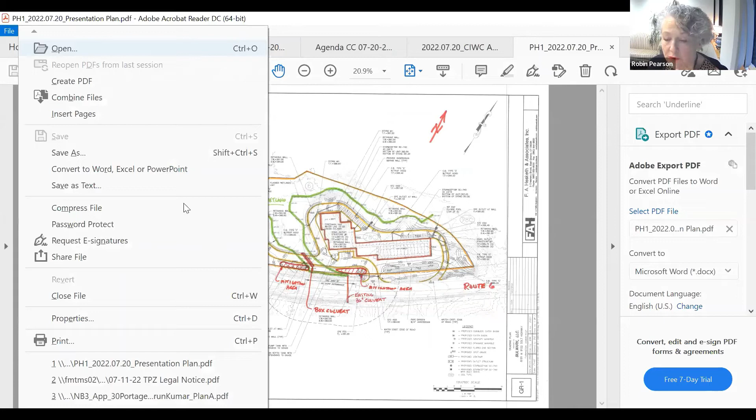On the call with me this evening should be Matt Morris for the applicant, David Ziaks with F.A. Hesketh and Associates, the lead engineer on this proposal, and also Anthony Zemba, who is a certified ecologist and certified soil scientist, who has provided additional information to you. He is with Land Tech, and you should have, as part of your materials this evening, some additional work that he has done with regard to questions that came up. They include an analysis that he did when he revisited an area that was identified as a potential vernal pool, though at the time of his initial review, he did not believe that it was, but he did revisit the site and has provided you with a memorandum that describes his finding as a result of that revisit. And then there is also a memorandum in the file now that is dated today, which responded to questions that were raised in the documents that we received from staff and with regard to the agenda review.

So actually, before I turn it over to Dave Ziaks, I'd just like to say one thing, which is that we understand that your next meeting is not until September 7th. And I just want to put on the record for you this evening that should you decide to keep this hearing open, we would, of course, provide you with a written consent to do so and to continue this to the September 7th meeting. So with that, I'd like to, pardon me? Thank you for that. Okay. For that, I'd like to ask Dave Ziaks to proceed with his presentation. Thank you.

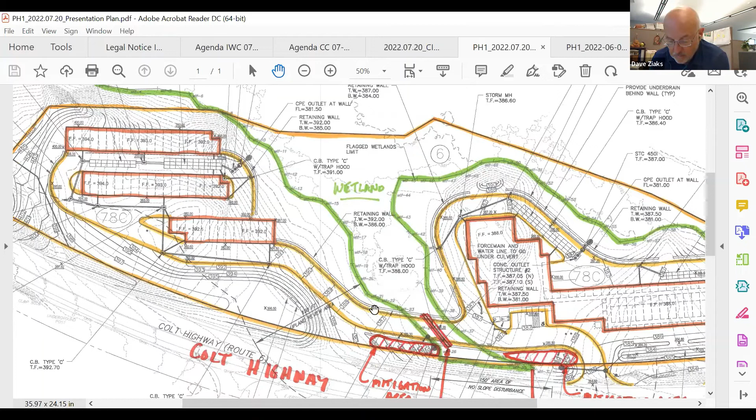We will need to excavate pad sites on both the left and right sides to accommodate the buildings. So as the commission members that walked the site could see, we have topography that's sort of all over the place, and we need to create relatively level pad sites to accommodate the buildings and the driveways around the buildings. The maximum coverage that is allowed in this zone is 40%, and all of our impervious coverages are under that. We're at about 39.1%. That includes the buildings and all of the pavement.

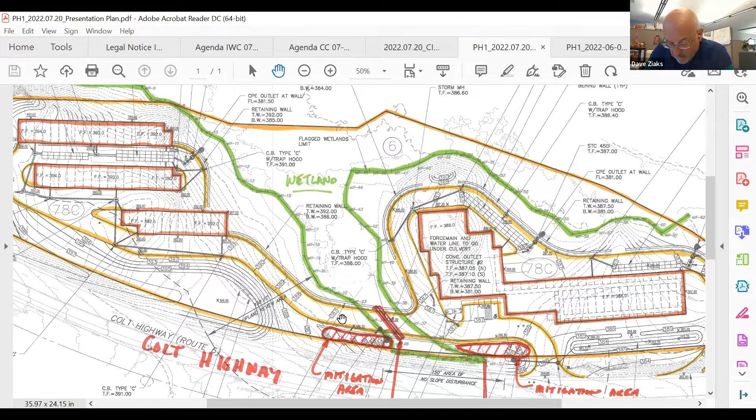For the drainage, we've completed a comprehensive analysis report dated June 3rd, I believe, and we provided that to staff. Your engineering department has had a chance to review that. The property is actually a very small part of the overall Bass Brook watershed, which starts north of here and continues to the south. It primarily flows downstream through culverts under the highway to what is known as the Deadwood Swamp, which is further to the south of this site, and it's a rather extensive wetland system down in that area. Most of the runoff from Route 6 in this portion of the highway is by sheet runoff to the north side of Route 6.

And actually the highway in this area is slightly superelevated, which means it pitches from the south to the north. And that's for geometry associated with the very large curve that exists in Route 6 at this location. That drainage then gets collected along the northerly side on our property, and then goes through a 36-inch culvert under Route 6, and again continues to the south to the swamp. In designing our drainage system, we had 4 goals basically in mind.

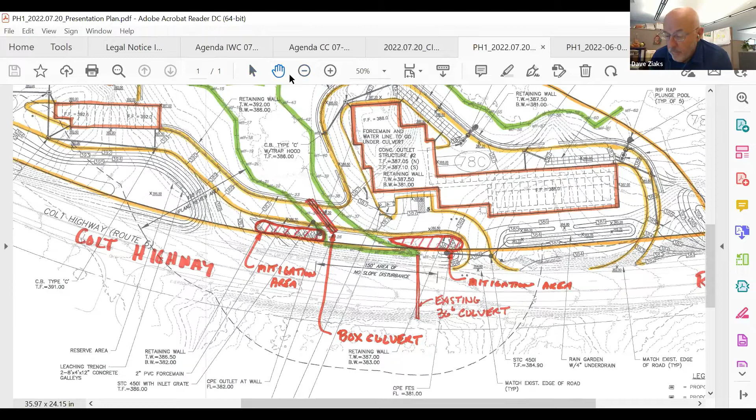Because the topography of the site has runoff heading to various points along the edge of the wetlands on both the west and the east side, we wanted to have several small discharge locations to sort of mimic the existing sheet flow from the existing topography to the wetlands. A lot of times you'll see projects that come before you where drainage systems are used throughout, and then the flow keeps getting consolidated, maybe over to a detention basin or something of that, and then released via some sort of an outlet structure, but it ends up being a fairly large consolidated discharge point.

By doing this system that we have, we now have 4 locations where there's a relatively small amount of flow coming at any one of those locations. And it sort of mimics the application of the water to the wetlands as it exists out there today.

We were successful in maintaining the peak flow rates below the existing conditions heading downstream for all the storms, 2 through 100-year storm events. We have provided water quality treatment, including some infiltration, we believe, with the underground systems that we have employed, that we will get some underground infiltration. We have not used that sort of credit in our calculations.

We have just assumed storage in determining peak rates, but I think that ends up being a fairly conservative design, because there will certainly be some infiltration in the site once we get into excavation and installation of our systems, which will be surrounded by stone and other gravel materials. We will get some infiltration. And then we've also added hydrodynamic separators to the outlet points, which will give us our pollution removals that are mandated by Connecticut DEP.

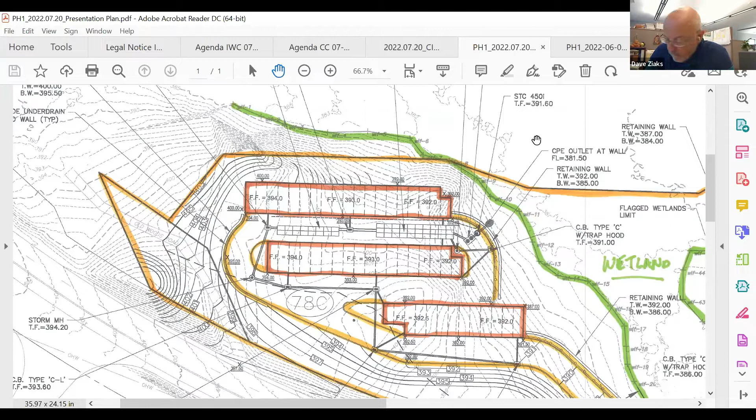We did manage to introduce some LID feature, principally a rain garden that will be constructed along the face of the easterly building. It will collect sheet runoff in that area and then blend into our storm drainage system. But we have a nice rain garden proposed in that area there to capture the runoff before it reaches Route 6. So in all, we believe our goals have been met with this design, and they are consistent with your town engineering standards and Connecticut DEP standards for water quality and for overall stormwater design.

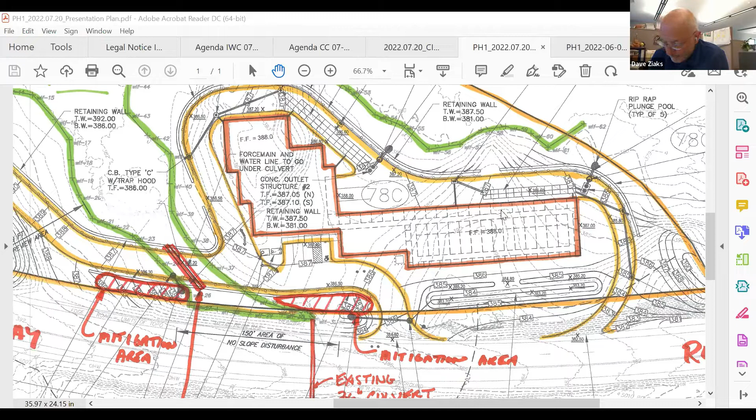As far as utilities go, we don't need a lot. We'll be installing a water main up Route 6 from basically where the apartments are that are right next to the Hampton Inn. The water main was left at that location by the Connecticut Water Company for the purposes of serving Route 6 maybe someday. So we'll be extending that water main up to our site, to our driveway. Most of that's for fire protection for the multi-story building, but obviously we can use it for whatever domestic use we need for our toilets and the like, because we will need some bathrooms.

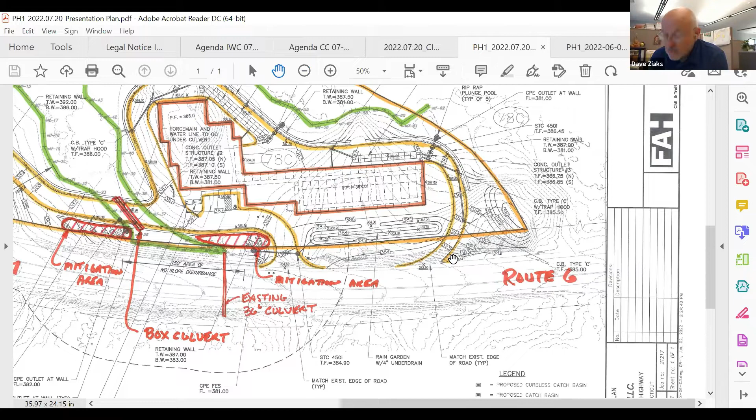And we will be installing a small on-site septic system over sort of right where the hand is there now. There's actually a pocket of some decent soil right in that area, but the system's going to be tiny. It only needs to be 50 to 75 gallons per day for the toilets and sinks that we'll need for the employees at the site, and possibly a customer who might want to use the bathroom.

As far as the wetlands disturbances being proposed, again, most of the site falls within the 150-foot upland review area. So our disturbance is 2.99 acres of that 3.51 acres that is on our site and within the footprint of our development. We have the driveway crossing, which will have a direct temporary disturbance during construction of 2,750 square feet, and then a permanent disturbance of 2,350 square feet with 400 square feet of that remaining in the open culvert we're proposing there. Now, if you recall, our initial proposal was for a 36-inch diameter pipe that would match the diameter of the pipe going under the Route 6 corridor.

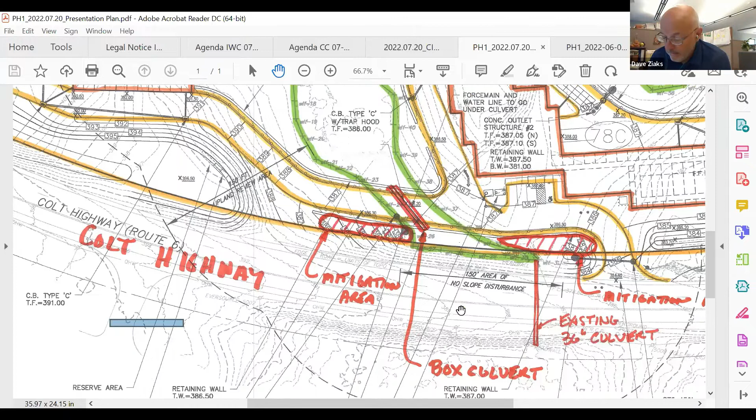But in discussions with staff and our initial discussions with the commission, I think everybody agreed that a box culvert would be a better solution that would have a natural bottom to it. And in doing that, we'll have 400 square feet of the wetlands that will remain in the open box culvert. So we end up with a permanent disturbance net of about 2,350 square feet with that crossing. Both sides of the crossing will be contained with retaining walls to minimize the footprint.

And in general, we believe that we will qualify for a general permit with the Army Corps of Engineers. It would be general permit number 18. I think this design will qualify for that. We will be applying for or notifying the Corps for a general permit once this commission were to approve this application. If it requires some other level of permit from the Corps, then obviously that's our responsibility, and we would apply for that accordingly. But we believe we should fall within the general permit design standards.

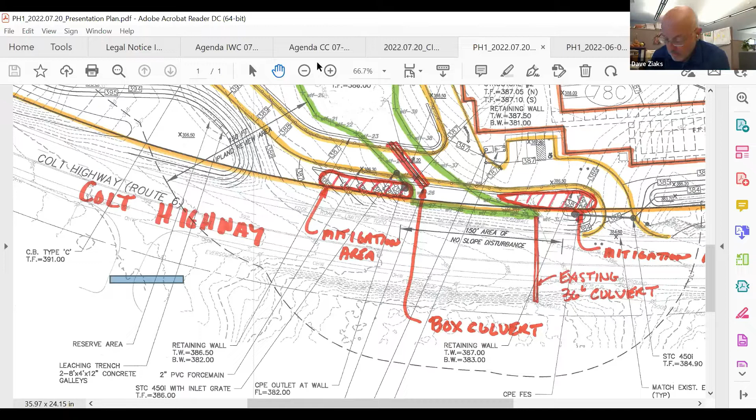Mitigation that's being proposed: we're using, again, extensive use of retaining walls to minimize our overall footprint and avoid any kind of slope down to the edge of the wetlands or in proximity to the wetlands. We're using an open bottom culvert at the crossing. We have included extensive mitigation plantings that are shown on sheet MI1. Staff has made some additional recommendations that we feel we can comply with, and of course, whatever else the commission may think.

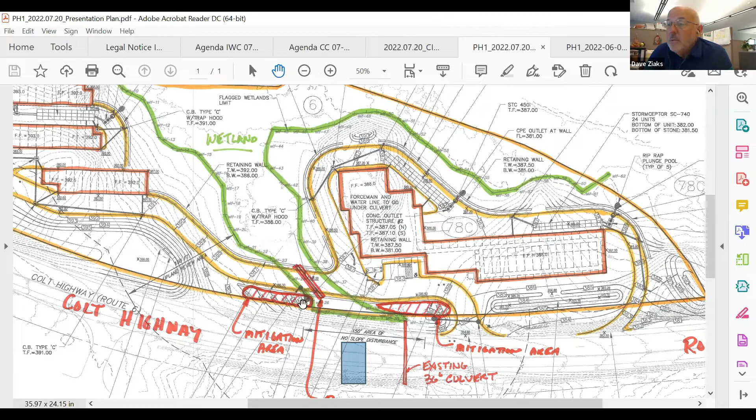Since the original submission, we've added 2 proposed mitigation areas that would be heavily planted. I've indicated those with those sort of hatched blobs on the south side of the driveway. Looking at it again in the field, it looks like an excellent place to do that. That's where most of the runoff from the state highway accumulates. And in those areas, there's a sizable amount of road sand and other debris associated with the roadway.

These proposed mitigation areas will, I think, have the additional benefit of helping treat some of the runoff coming from Route 6 before it reaches that culvert. And those 2 areas would total about 2,601 square feet. So slightly more than the permanent disturbance that will result from our crossing.

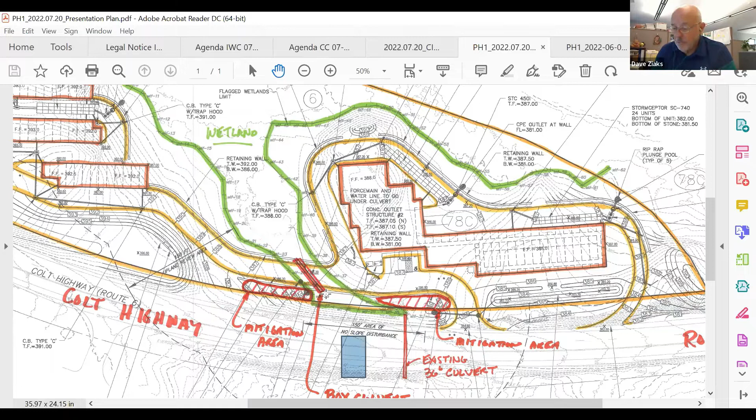There's been some questions and comments regarding excavation and rock removal issues. We have a construction management consultant working with the applicant to do preliminary reviews and cost estimates and the like for the applicant. And their preliminary estimates indicate that there'll be 20 to 25,000 cubic yards of total excavation, added together on both sides. A lot of that will be rock requiring machine ripping and some blasting.

But for the most part, the materials will remain on the site. We'll process them on the site, and we'll use those for backfill in the walls and for process base under the buildings and under the bituminous concrete or the asphalt driveways on the site. So there'll be very little of that excavated material removed from the site.

Obviously, the trees that are cut down and a lot of the topsoil mix, that will be removed from the site like you would on a conventional construction. We will be able to retain some of the topsoil for planting purposes, but that tree debris and topsoil will be removed from the site. But the vast majority of the soils and rock that are excavated on the site will be reused on the site.

And really, most of the excavation takes place over on the westerly portion of the site, mainly because there are two relatively large knobs underneath that pad site for the west side buildings. Over on the east side, there's actually not that much excavation necessary, certainly not any deep excavations to construct the large building there and the pad site for that building. Most of the rock is over on the much more hilly west side of the site.

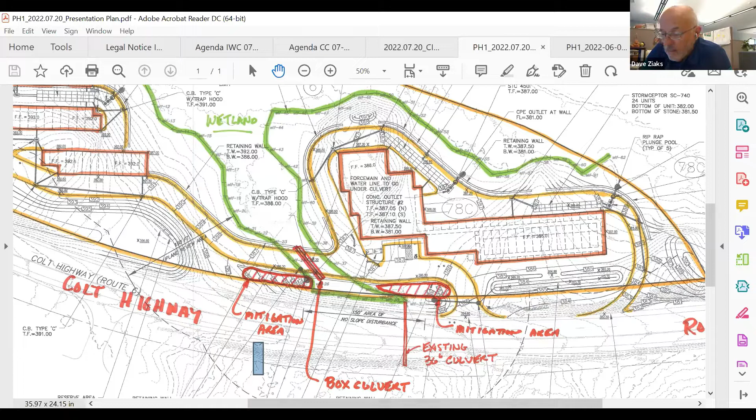There's also been some discussion and comment regarding the distances to the flagged wetland limits, again, other than the crossing, which obviously has a direct impact. On the west side, the distance really would be between the face of our retaining wall and the edge of the wetlands. In all cases, that's greater than 25 feet.

And as you can see, the wetlands line is sort of a snaky little line. There's no real straight portions of the wetlands line. And for that matter, the edge of our development is kind of a snaky little curvy line. So we don't have a lot of long instances where the development and the wetlands are parallel to each other. But in the west side, we're greater than 25 feet.

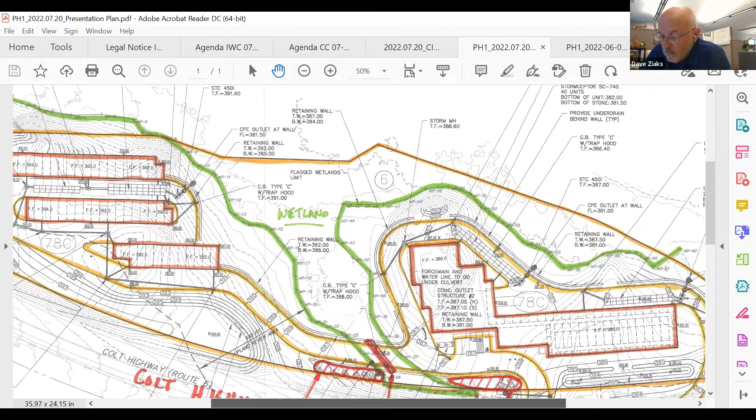And then over on the east side, again, we have mostly curved pavement or walls and not a lot of parallel to the flagged wetland situation. And in those cases, we are at least 22 feet and in some cases greater than 25 feet from the bottom face of the retaining walls to the tightest points.

Except we do have two pinch points, what I'm calling pinch points, where the wetlands flagging created a bulge, if you will, that gets us closer to the wall, where we're going to be 10 to 15 feet at that point. And then way over on the east side, there's a place where the wetlands kind of creates a pinch point and then turns off to the north, right in that one area there, where again, we're in that 10 to 15 feet situation.

But elsewhere, I think we've done our best to maintain a 22 to 25 foot as a minimum. And then because of the snaky, again, I'll call it the curvy aspect of the wetlands flags versus the development, you get greater distances than the 25 feet.

We have had a chance to look at the town engineering initial comments and then the agenda review as well. Obviously, some of the comments incorporated here are really more geared towards TPZ site plan approval, but there's a lot that do correspond to wetland considerations. At this point, I don't have any significant issues with addressing those comments. I find nothing there that's unreasonable or that cannot be addressed with responses to the comments.

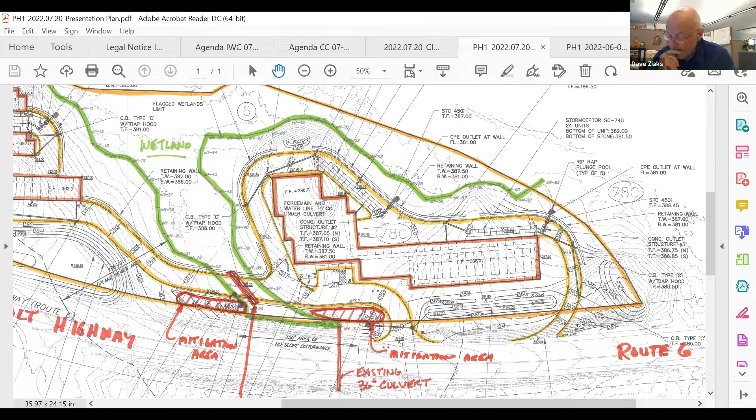And at this point, what I'd like to do is introduce Anthony Zemba from Land Tech. His firm did the flagging. As Robin noted, they provided you with a full evaluation report dated back on June 3rd. And then I asked him to do a follow-up memo, really to talk about revisiting potential impacts to the wetlands as a result of construction. And then there were some comments regarding one line in the NDDB letter that was received from DEP regarding the possible conduct of additional biological studies. And Anthony can tell you what his opinion is regarding that matter based on the data he has found.

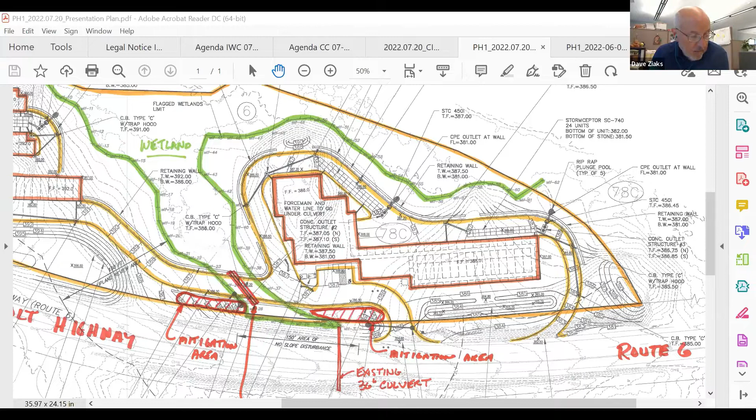And then he also did a vernal pool reevaluation. They went out again, as Robin pointed out, in June to take a look at the area. And I think you can read his conclusions for yourself and what Anthony will present, but it doesn't look like we have any vernal pool issues on the site. So with that, I'll turn it over to Anthony. And then once Anthony's completed, we'd be happy to answer either the public's questions or the commission's questions. Thank you.

Okay, thank you, David. Can everybody hear me okay? Yes, we can. Okay, thank you.

Hi, my name is Anthony Zemba. I am a senior environmental analyst with Land Tech. I am a certified ecologist and soil scientist and certified hazardous material manager. I am assisting the FA Hesketh team on finding ways to minimize and reduce significant adverse impact to the wetland and watercourse resources on the site. The wetland delineation that was done by our firm last December is accurately depicted on the plan sheet, as David pointed out.

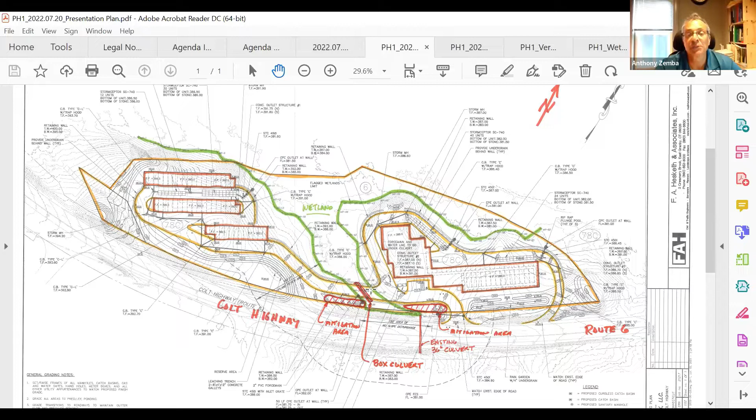This is a system that receives the majority of its hydrology from a stream that flows to the north underneath Route 6, west of the site and off site. And so that culvert isn't depicted on this plan sheet because it's way to the west. No, further west. Oh, you want this? The other way? Yep. Oh, west. Yeah, and it flows north, into that wetland system there. That's the majority of the hydrology that's contributed through an unnamed riverine system. When that riverine system hits the vegetated wetland there, it kind of braids out into several slow flowing channels.

There is one distinct channel along that northern property boundary, as being shown there by the hand, and that flows to the east and stays along that northern property boundary until it flows off-site to the east and joins another unnamed tributary stream that then flows south and leaves the site through another culvert to the east of our property.

The box culvert area that's shown here and the exit in that existing 36-inch culvert that's depicted on that plan set drains a small portion of the wetland. It just kind of drains that area where the hand is. There's a saddle there in terms of topography. So really most of the significant runoff from the site flows through the wetland system to the north of the site, through braided stream channels through a larger wetland system, as shown by the hand.

So that wetland system there is what we call a palustrine interspersed system. At one time it was probably a pond or some dammed impoundment that eventually filled in. It has a pretty flat grade throughout it, and probably through succession reverted through a successive cycle of a palustrine emergent wetland to a scrub shrub wetland, and then eventually was beginning to form a palustrine forested wetland.

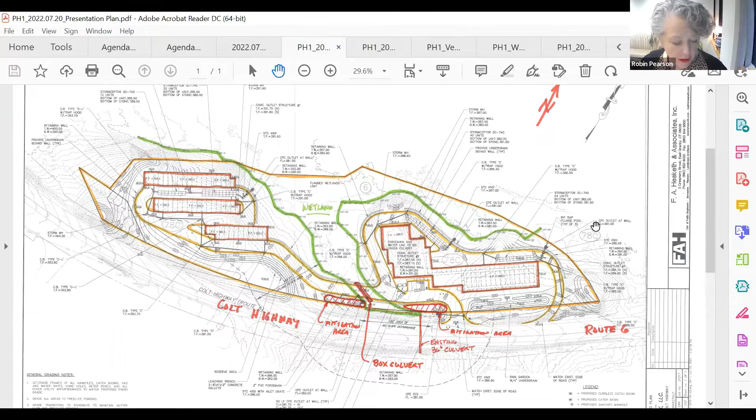So Robin, did you have anything else to add before we take on questions? Yes, let me just turn my... Yeah. Anthony, I wondered if you could just, on the last page of your recent memo, you made some findings in terms of what, in your professional opinion, the impact on the wetlands was, and I just wondered if you would reiterate that for the commission.

Yeah, so that's basically what I said. I closed with mentioning that installation and maintenance of those proper E&S controls during construction will avoid the temporary adverse impact that could have happened during construction. The use of the retaining walls and the mitigation plantings and proper construction of the drainage system will avoid long-term permanent adverse impacts to the wetlands as well.

And with the current design that's proposed, you're mostly staying outside of that minimum 25-foot separation distance, except for a few pinch points that David pointed out. And in many cases, you're well beyond that. So all these measures taken together with this revised submitted plan will ensure that no significant adverse impacts will occur to the wetland system on site. Thank you. Welcome.

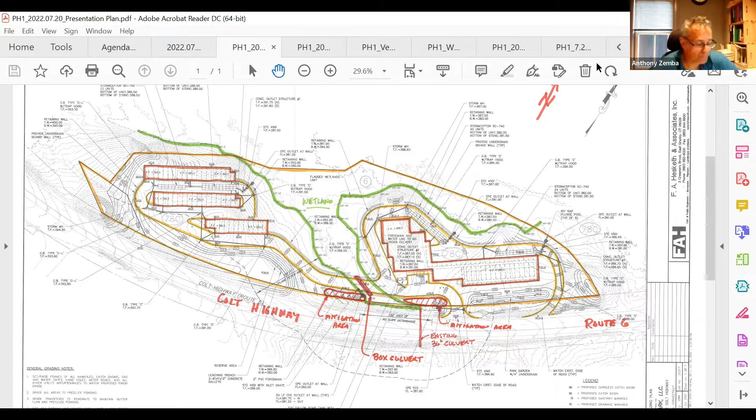Well, like I said, in the absence of red flags, you could go out and do full-on biological studies on any site that comes across your desk. And so maybe prudent's not the word, but warranted. I don't see where it's warranted. Unlike some other Trap Rock Ridge projects that I've worked on in the state, where you do have these special habitat attributes. And if somebody said, oh, we don't think a biological survey is warranted, I would wholeheartedly disagree.

Like I said, we identified well over 100 different species of plants on that property. So we know the communities out there fairly well. We just didn't find any of those red flags in terms of the biological component that's occurring there, or the physiographic conditions that tend to support these rare species. So it just doesn't seem warranted. I think warranted is probably a better word than prudent, given the significance of prudent from a wetland and conservation context. Okay, thank you. Mr. Chairman, that's all I have. All right, thanks, Robert. Dave?

Yeah, I share Robert's concern both about the crossing and the kind of extensive development being proposed. It's kind of a tough site. I guess about 90% of it is our regulated area in between the wetlands and the 150-foot setback area. And virtually all of the proposal is within that regulated area.

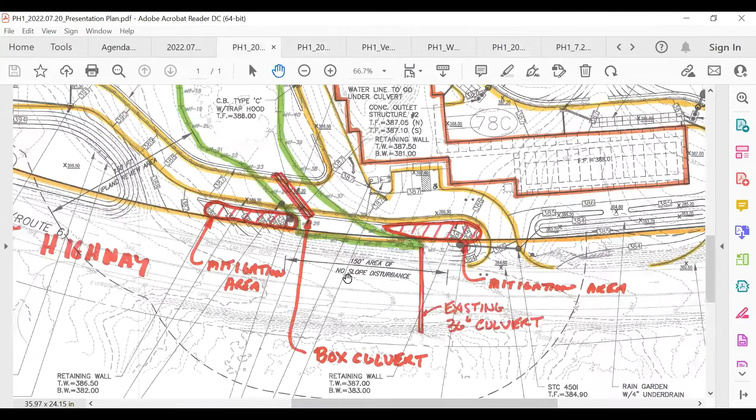Bruce, could you bring up the colored plan again? Thank you. I had a question on your clearing limits on the wetland side of the proposed wall: how far from the base of the wall are you proposing to clear, and what kind of vegetation will be retained in that area? That was my first question.

My second question was the box culvert that you're showing. Is that a 4-foot wide proposed box culvert that would be filled on either side of it with an open bottom?

And then my third question is in the mitigation areas. They're proposed directly adjacent to the DOT right of way, and apparently DOT likes to clear cut the vegetation in that area. I'm wondering if an overzealous DOT maintainer might clear cut the mitigation area just because of where it's located. And especially the mitigation area on the left appears to have at least a 6-7 foot slope to it, as it's shown on the current plan.

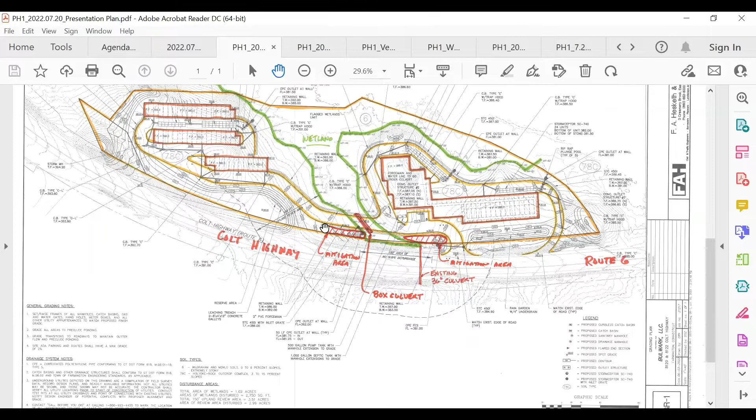I mean, maybe you're going to revise that, but I'm just questioning a sloped mitigation area and how effective that would be. That's my 3 big concerns.

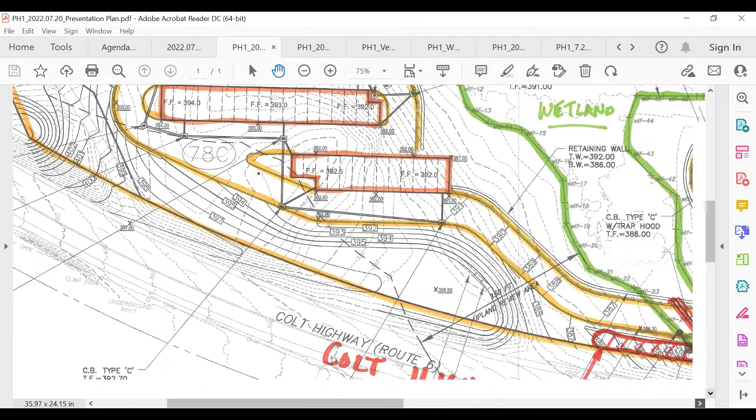Yeah, so as far as the clearing, right in the immediate area in front of the walls, we generally will put the silt fence probably about 3 feet in front of the wall. These types of walls that we're proposing here are block walls. They're essentially 2 by 4 by 2 feet. So there's not a large foundation associated with these walls. It's a stone base, and then the walls sit on the stone base.

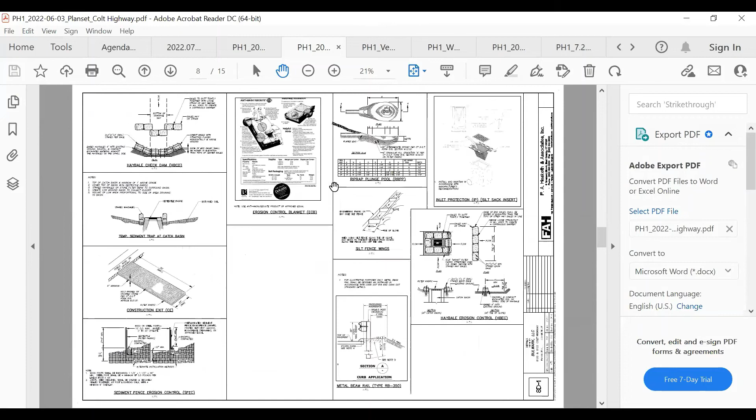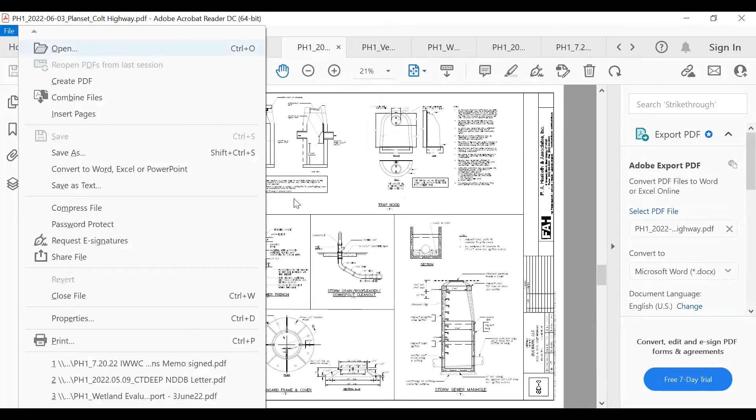So it's not like a typical concrete wall that might have a 5 or 6 foot wide concrete footing that needs to be built. That's not necessary here. And in a lot of cases where the walls are going to be located, it's relatively level beyond that point up to the edge of the flagged wetlands like we witnessed out in the field. So these walls are going to be fairly easy to construct. They're not very tall, on the order of 2 or 3 blocks high. So the installation is going to go pretty quickly.

And then in that area, that's where we have the various mitigation type plantings proposed all along the face of the wall to help restart Mother Nature's replacement of anything that gets disturbed in that area, which will occur pretty quickly. And that's shown on our MI1. As we talked about earlier, staff had some additional recommendations on the types of plants there. We'll work that out with staff, our landscape architect, and with Anthony to make sure that we have the right mix of the most effective plantings.

Then the mitigation area, yeah, this is a markup of the grading plan before I actually have the grading for that mitigation area shown. So I understand your question, and I'll address that with the revised plans. As I think I mentioned in the initial presentation, I'm trying to find an area on the site to do some mitigation that doesn't, by sort of happenstance, create another problem that's not here.

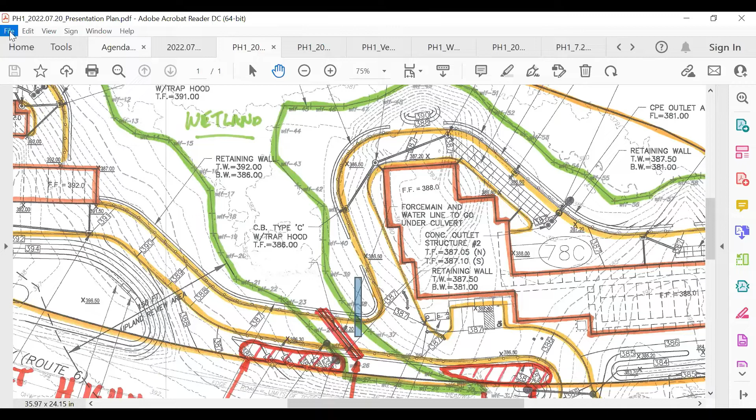I see sometimes on plans where people create wetland mitigation areas that ultimately cause more trouble than they're worth. They disturb parts of the property that have never been disturbed before. I see it all the time, and I often question why we are doing that. But in this situation, where we know this is a heavily disturbed area currently, I think this is an opportunity to clean up these areas, remove the road sand and things of that nature, and then replant it with tolerant plants that will be successful in this area, but won't grow high.

The big issue with the DOT out here is vegetation that grows high. And what happens is, with their limited resources, they have a tendency to allow these things to grow too tall, and then they come in and just massacre everything as a solution to the problem, rather than trimming sight lines and shoulders on a more regular basis, and not using an 8-foot diameter high-speed lawnmower to do it.

But that's the reality. So if we plant this area with low-lying plants, vegetation, wetland plants that do not grow over the top of the guide rail and things of that nature that has the DOT do what they do, then I think we can be successful in providing a pretty decent mitigation area in those locations.

But the big thing is, again, the DOT does what it does because it waits too long to do it. And then their answer is to just wipe everything out. So if we change the character of these areas and make them low-lying vegetation, maybe we'll be successful and keep them out of there.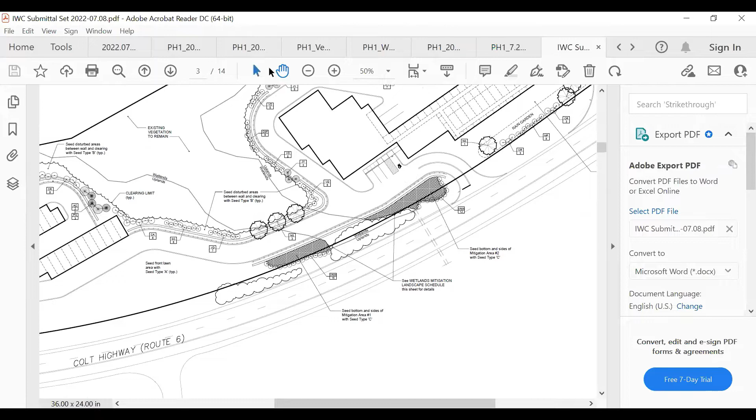Okay. The culvert will be 8 feet. It's a 4x8 culvert, so it will have a height of 3 to 4 feet, with a natural bottom, and then it spans like a bridge 8 feet. So the opening will be 8 feet wide and 3 to 4 feet high. And how wide is that section of wetland that you're crossing?

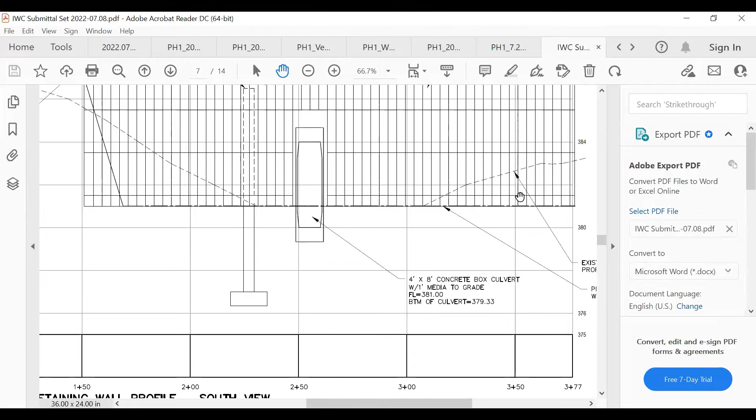It is around, well, let's see, it's skewed. So there's 2 dimensions. One is the culvert is longer than the span or the width because it's angled. But you have the roadway through there, proposed driveway is 23 feet wide. And then we have about 3 feet of shoulder so that we can put our own little guide rail in there.

And then the width of the wall. So we're looking at 23, 26, 29, 2-foot walls, 31, about 33 feet from face of wall to face of wall. The culvert's about 50 feet long because it's skewed. It doesn't go directly across the road at a 90-degree angle. And how wide is the wetland in an east-west direction along your center line?

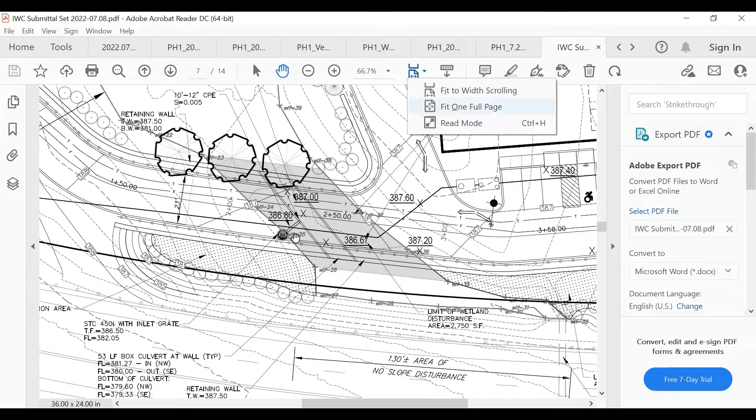Yeah, the wetland. Hold on just a second. I have a full-scale plan behind me, if you would wait just 1 second. Sure. Yes, measuring down the center line, it's about 45 feet wide. So we're impacting basically a 45-foot wide wetland area and proposing an 8-foot wide box culvert. That's correct. Okay. Thank you. That's all I have. Thank you.

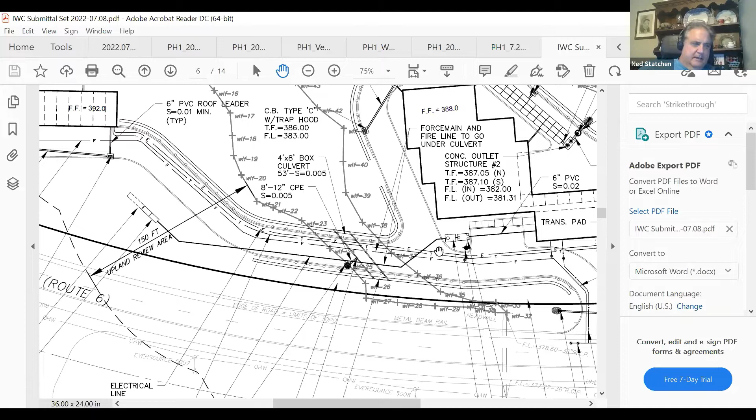Ned, I see you snuck in. Yeah, I was having some technical difficulties getting in, and I had to go into the general public line on the meeting agenda. But yeah, I was just a minute or two late.

I'm kind of going along with what some of the other commissioners have said, like on the west end with the 3 buildings. First question is, does this project involve that small piece of property as well as the large piece, or is that separate property? Go ahead. That will be merged in to create the 4.99 acres. Okay. So this project area is both lots.

Okay. So the length of the middle and then most north building, if we could shorten the footprint on those to get them a little further away from the wetland, give us a little more buffer. And I was also wondering, I don't know if it's necessary for emergency access vehicles, but on the easterly end where you have that roadway behind the block wall, is that necessary? Can you have two dead ends and then not need that circular curve there?

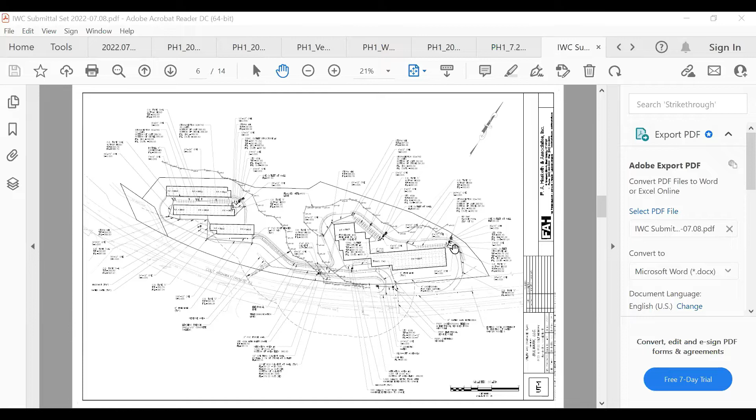And I just want to confirm, where you do have these block walls being built, you're gonna do plantings in front of the block wall. Is that true? Yes. Yes. Okay. Yeah, there'll be an extent of, we call them mitigation plantings, but plantings in general. Okay. Well, that's my only comment.

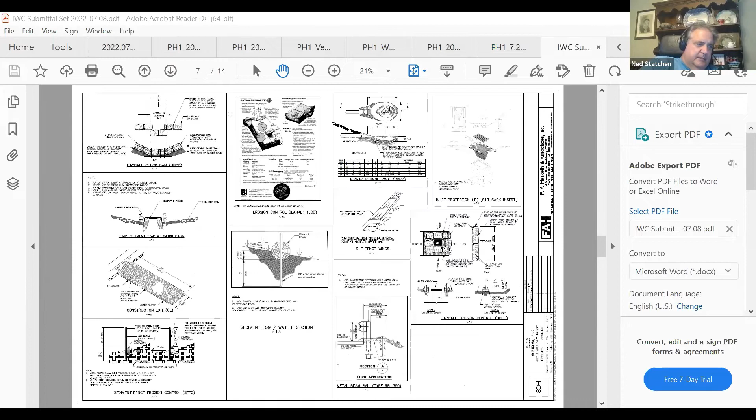Thank you. All right, thanks, Ned. Yeah, I do have some stuff. Some of the concerns have already been expressed by the commission members. And I think the way this is being designed is trying to maximize what you can get on the site. And it puts us in a little bit of a bind in terms of wetland buffers, things of that nature. So I'm a little concerned about the scope of the development.

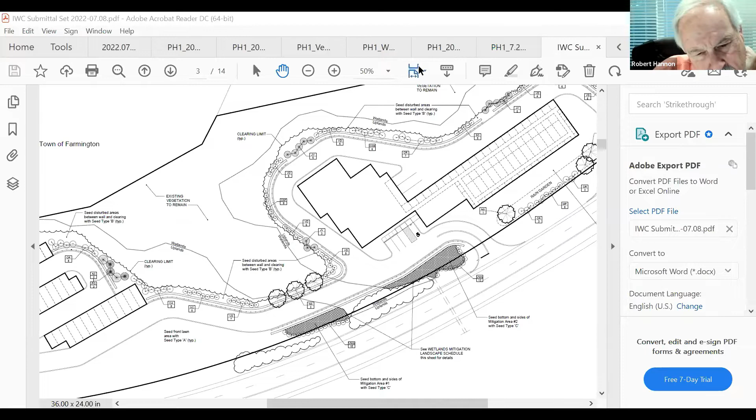I want to go back to one of the comments with the blocks that are used for the retaining wall. Can you describe how those are actually installed? Because I understand you're saying you don't need this big foundation, but are the blocks lowered into place from above, or do they have to go side by side? So are you going to have an area where you've got truck traffic or heavy equipment traffic on the outside, where you have to go in and get closer to the wetlands where you're putting the blocks in?

Yes, that's a good question. That's sort of the beauty of this system. That's why these are so popular right now, you don't need to do that. You can work from the top down, or the back, of these blocks. So you put in your stone, then you put in a row, then you start your backfill, then you put in another row and more backfill, then you go to your final row, which usually is a landscape block. So it has that little landscape notch at the top, so you can bring your landscaping right almost to the front edge of the wall.

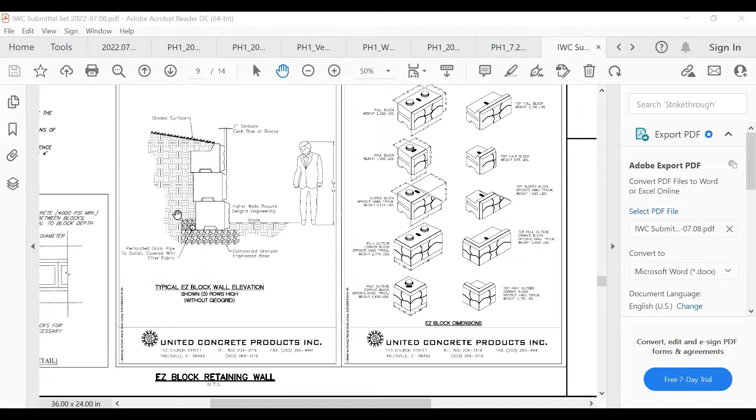So really what you see when you walk along the top of these walls is about 6 or 8 inches of concrete edge, but the rest of it is vegetation right up to that point. And in areas where it's taller than 4 feet, we put a little 4-foot high black vinyl chain link fence just for safety, so nobody falls off the wall. But the nice thing about this is you don't need to bring machinery down in front of the wall.

And I just built a very large one of these over in Bloomfield for an apartment complex that actually had, you could argue, a more sensitive wetland than this because it has a major brook running along the side. And we were very successful in doing that and not causing any loss of that buffer area beyond the silt fence barrier that we put up first. So you can successfully build these.

And again, this is not a very high wall relative to some of the monster walls you see getting built on lots of sites these days. This is a fairly modest height wall and should be pretty simple to construct.

In terms of the wall, are there any spots where you basically have to cut material to be able to put the wall in? Well, I can understand along the entire length, you have to scrape out for a stone foundation before you put the wall in. Right. Yeah. But I'm just curious if there are any areas where you need to be cutting 3 or 4 feet of material that's already there in order to get to the grade to have that lowest block installed. Because again, I'm not sure how easily that's going to be done from above.

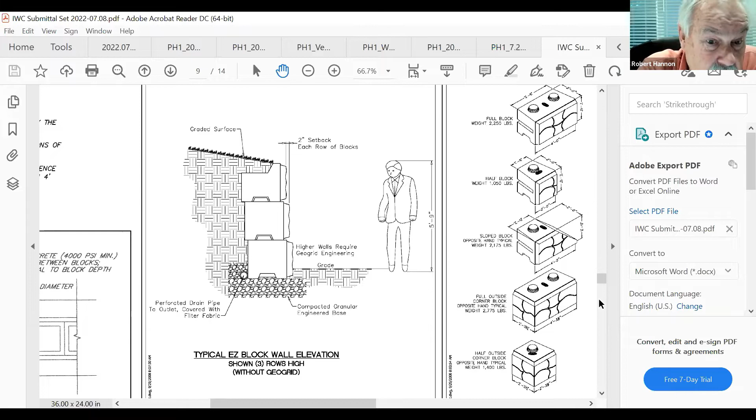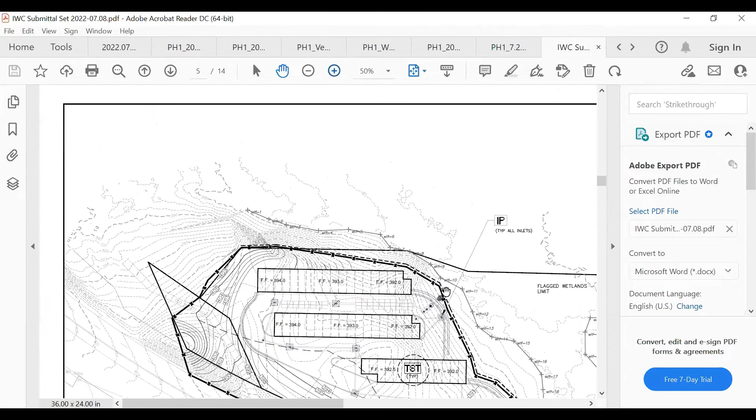Yeah, I think you'll see that the vast majority of it is pretty much following the contour lines. Over on the east side, we actually blend into 2 large knobs that buffer the wetlands. The wetlands are actually on the downside of the knob, sort of like right there in the center of the picture now. There's a knob there, that 390 knob. So the wetlands are on the downside of that, and the wall would blend into that area there.

And then further over to the east, right above that 387 contour line that's coming out of the building there, right above where it says first floor 388, there's another knob situation where the wall will blend in from both sides, and then the wetlands is on the other backside of that knob. So for the most part, this thing is sitting on existing ground, and we have to scoop out a foot or so to put stone in and then start the wall.

So I really feel that we will be successful in putting this thing in and stay within the limits of our silt fence and hay bale backing. There's no particular reason to go traipsing around on the front side of the wall to finish this installation.

Okay. If you don't mind me expanding on that, what happens if the soil is not adequate and you've got to do a lot of hogging out of some material? Has there been any soil testing done down here? Sure. No, but the entire area is underlain with rock formations. Yeah, I can see that up here. I'm just wondering down here in these lower areas. Yeah, down in those areas. I have not done a specific test in that area, but just observing the site in general, there's no real unsuitable materials out here.

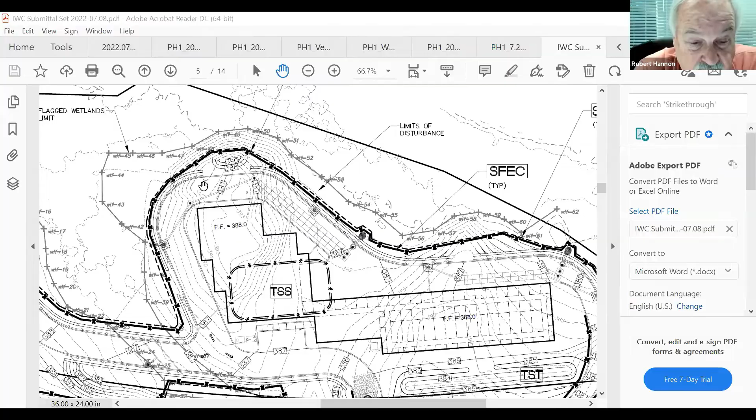Because my guess is, and this is strictly a guess, in this area you have 2 large pieces of property to the north of this, both owned by the town, and there hasn't been any development there. So there's really been no reason for anybody to go out and check. I'm just wondering if anybody has done a soil analysis to determine if there are any species typically associated with those types of soils.

This is Anthony Zembla from Land Tech. David, you want me to address that question? Oh, yes, because I only know snakes I see. Yeah. And some of these are rather hard to find. Yeah, so was that Mr. Hannon that was speaking there?

Yeah. Those are excellent examples that you provide, and in terms of rare species conservation in Connecticut, that's absolutely true for some species, and the predictive models that are done to look for those species are based on those types of attributes. It's not always soil type, but it can be, and you provided two excellent examples: spadefoot toad in Hinckley gravelly, sandy loams, especially in the greater Thames River service area.

Again, the Holyoke soil series and the Holyoke bedrock outcrop series combined, yes, can harbor rare species when some of those other physiographic conditions are present. So in this case, it's not just the soils, but a combination of physiographic conditions. By that, we mean soil moisture, water holding capacity, wind exposure, sun exposure, things like that.

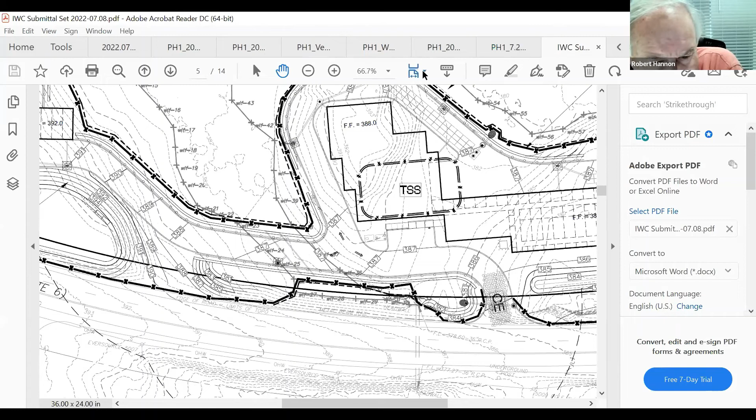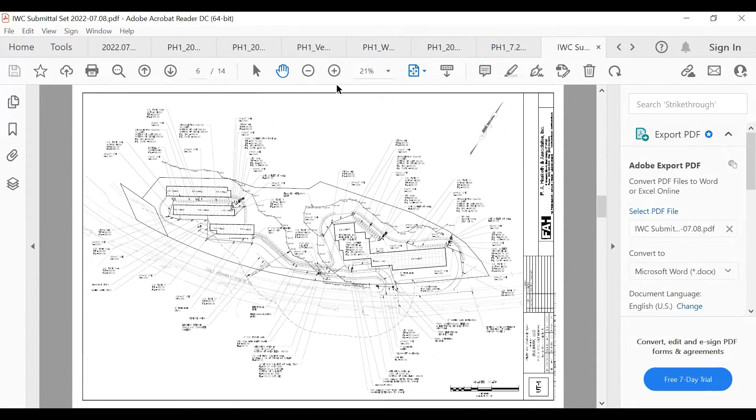Yep. The reason why I selected that area is my field observations. It looks like a good candidate, and there happens to be very close by a very large tree that tipped over, and it has about 4 or 5 feet of soil under the tree. So that's my test hole for now. It's a very large tree. I'm not exactly sure why it tipped over, since it had such a soil mass associated with it, but Mother Nature being what it is, it tipped over, and it gave us a really good indication of the soil that's available in that area. And I think we'll be successful.

It's going to be very small, just a couple of galleys in size. And the reason why I put it there is, in addition to the good soil, you've got all kinds of setback requirements in the state health code, 25 feet from this, 50 feet from that. And this area actually will meet all of those standards. So it's a good, safe place to put a small septic system. Even though it's kind of a pain to get over there, it's the best place. Just out of curiosity, did you do any perc tests over in that area? No, that's going to be next.

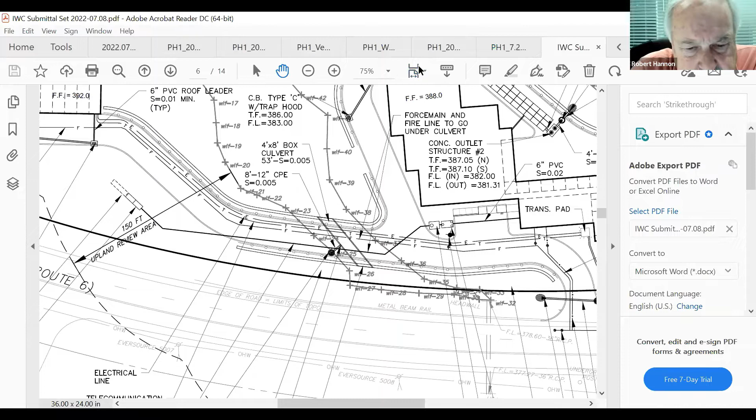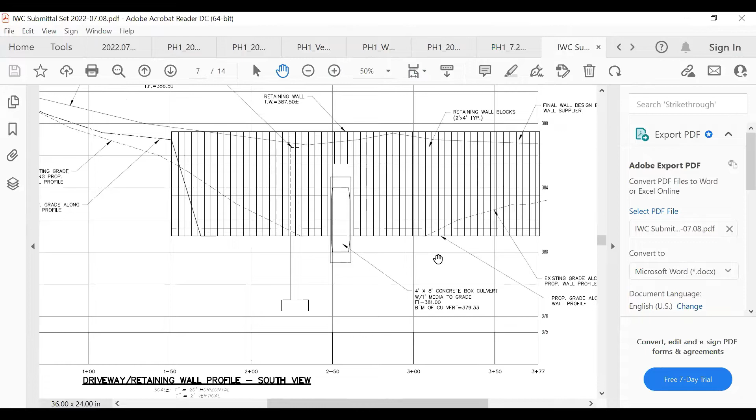Yeah, it would go down below the culvert. So we would install that first and then place the culvert. Pretty straightforward, pretty quick construction. I think we sized it at a 2-inch PVC pipe. Okay. How long do the pipes typically run, or how long of a section can you get them? Oh, they're generally, well, a 2-inch. The reason I'm asking. Yeah, the 2-inch PVC pipe comes in a roll, so it's probably 50, 100 feet of length or something of that nature.

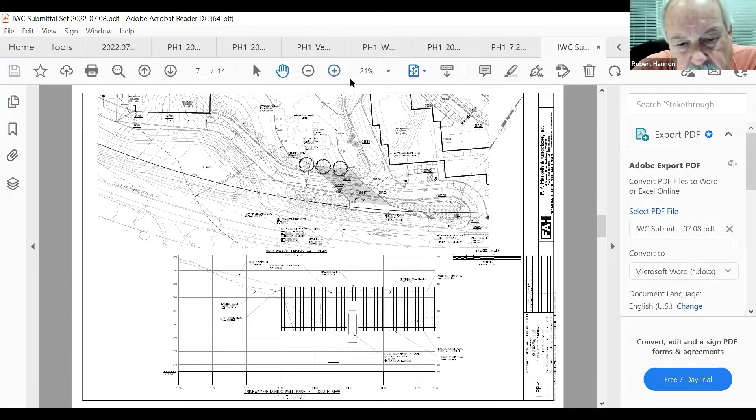Okay, that's kind of where I was going, because one of the concerns I would have is if there's splices under the wetland area. That's why I'm asking. Yes. There would not be push-on joints of any kind, that's for sure. They would either be solvent cement joints or a continuous pipe. Okay. All right. Thank you.

I don't really have any other questions, but again, I am concerned about how intense the development is and how close you are to the wetlands, even though the work that's proposed within the wetlands is somewhat limited. I'm still concerned about how close we are in some areas to the wetlands. I've just got some concerns on it, and I'll leave it at that.

So do any other commission members have any other comments they've thought of since other folks have talked? And then Bruce, I'll go back to you to see if anybody from the public wanted to speak. Are there any other commissioners that want to add anything? Yeah, this is Ned. I just realized another question.

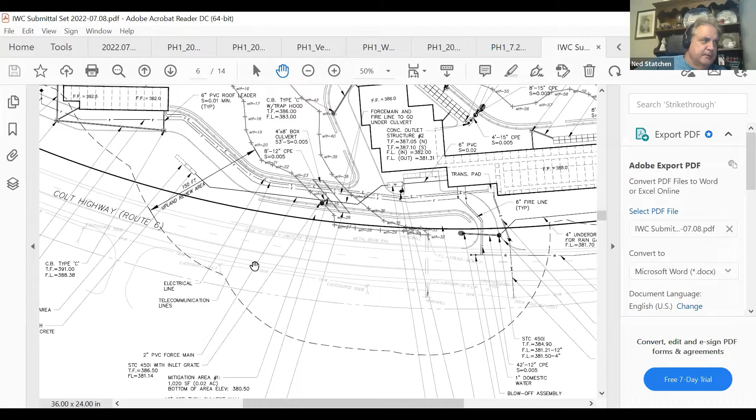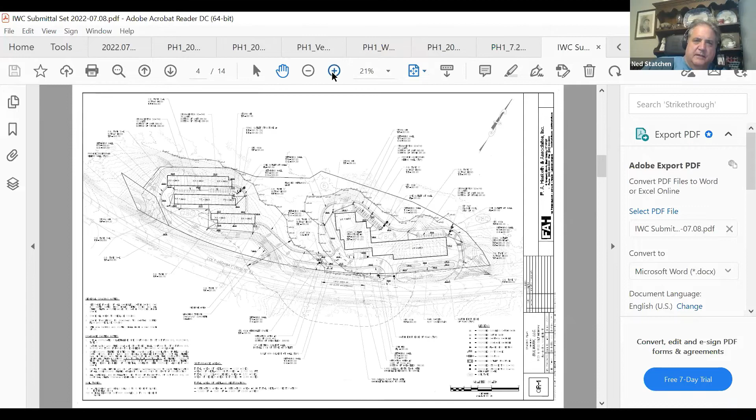On the west end, the building that's most north, what is the back of that building going to be? Because if you look at the contour map, it gets very steep through there. Is the back wall going to be deeper so that it acts as the back wall of the building and the retaining wall too? Yeah, that's basically what we're proposing there, rather than bringing another driveway around the back side or anything like that.

It's digging in way over on the west side. And then over on the east side of that building, it acts as a pretty small retaining wall, actually, because where you see the 392 spot grade, it's like 391 right in that spot. So there'll be like a foot or so of concrete exposed there.

And then as you move further to the west, there's a knob right in that area. So it ends up being like a foundation wall in that area right in there. And so it does a couple of things. It's sort of like a foundation wall, and then it's a retaining wall as it goes across the back of that building.

But again, once that thing gets built, and you restore that area, plant it back there, other than some maintenance, maybe somebody walking around the back side of that building for some reason, I don't think you're going to get very much activity behind that building after it's built.

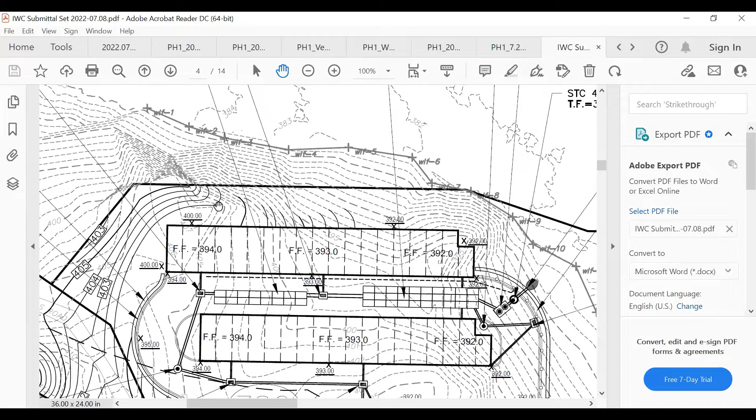Okay, thank you. Bruce, can you just scroll down a little bit on that? I want to just double check something. No, that's good, because I thought I saw something where there are electrical lines. I just want to be clear on this. These are 3-story buildings or 1-story? No, everything on the west side is a 1-story building like you would see at most of the self-service places. Okay. I just wanted to make sure I had that clear in my head. Sure, thank you.

So any other commissioners, any other questions right now? I just have one real quick, because since we're talking about elevations, we haven't done test pits, so we don't know if it's sitting on ledge or not. What is your proposal for if you can't get a foundation in? Are we blasting? Oh, some of the rock is going to have to definitely be blasted, yes.

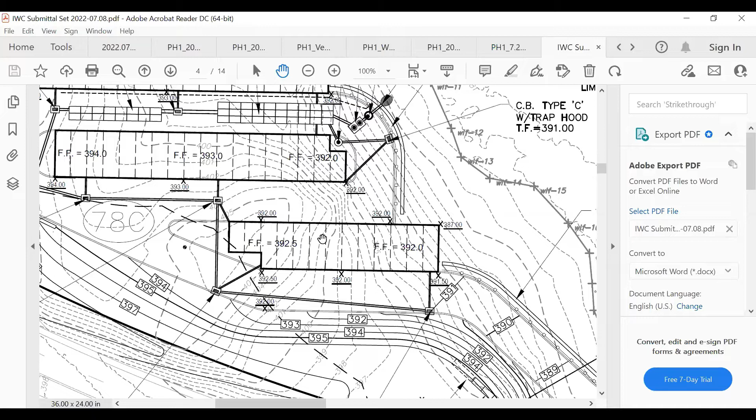Some of it will be able to rip out, but there will be some blasting necessary, especially in the knobs. So on this drawing that we have shown here right now, right here at the bottom of this first building where the FF, first floor 392 is, there's a fairly decent sized knob right in that area. And that rock is going to have to be removed probably with at least some blasting, especially as you go deeper. That's just a weird knob of rock right in that area.

So in order to create the platform, or I call it the pad, because you can see these buildings are fairly level. We're going from like 392 to 392 and a half, just to have a little slope in the pavement in front of them. These buildings are generally built with very few steps in them. It gets complicated to try to build these buildings with a lot of steps on them.

So that's one particular area right in there that's generating a fair amount of cut. But the good news is it's a long way from any wetland features anywhere. So shame on us if we can't remove that rock without any disturbance to the wetlands. But it's still in the upland review area. Oh yeah, well, I can't dodge that. At 150 feet on this small lot, that's a lot of area. Right. Okay. Thanks, Bobby.

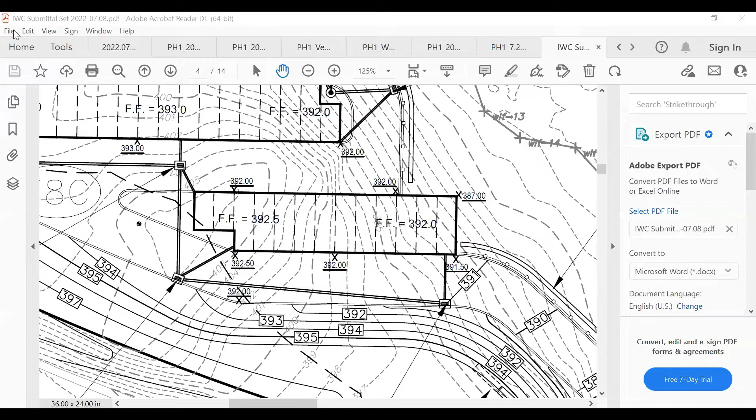Well, actually, Bruce in his report, I think, did an excellent job of listing things that you're probably going to make as a condition. Just bear with me one second while I sort through my pile a little bit. I think it's a good starting point for a condition of approval down the road if we get there. And it was in, maybe it's in his engineering report.

But without wasting everybody's time tonight, we will come back with a specific list of things that will be prohibited. I can tell you now, typical things such as storing any quantities of petroleum products and things of that nature, or chemicals, will not be permitted in the units. And certainly no vehicles, cars, boats, things of that nature, things with engines won't be permitted in the units. And some of that has to deal with fire ratings of the buildings as well. But we'll come back with a list specifically for the commission.

Thank you. Was that it? Okay. Yes, thank you, Mr. Chair.

So, Mr. Chairman, is it safe for me to say that at this point, we've got some time. I think I hear from most of the commission members that they would like to see us go back and do some more homework and attempt to increase some of the separating distances, buffer areas, whatever we'd like to call it. I'm not sure I can do much more improvement on the design of the culvert crossing. I think we've minimized that, and it meets the general criteria for general permit, satisfy DEP and the Army Corps of Engineers. But I think the comments that I'm hearing are concerns about some of the separating distances and whether we can improve upon that. I heard the same thing, so I don't disagree with you.

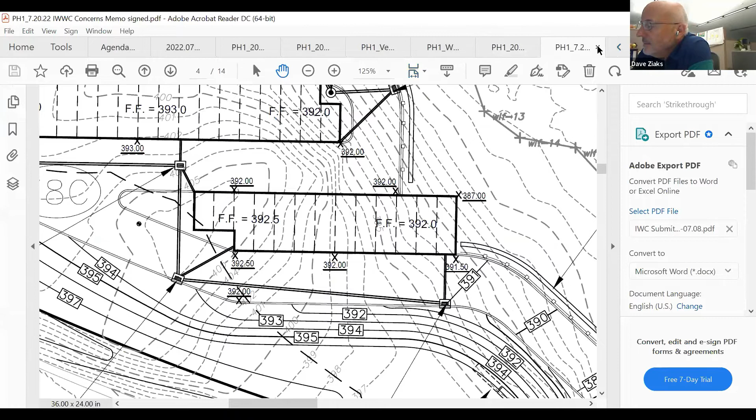Thank you very much. Yes, that's my intention. Thank you, Mr. Chairman, and everyone enjoy the rest of your summer. Thank you. We'll see you in September. Yep. Well, that sounds like a song, doesn't it? Yeah. Yes, it is. Happenings, I believe. Good night. Night. Have a good one.

Under new business, Bill Aston, 110 Hyde Road. Bill, are you on? Bill's not on, but I am. I'm Brian Latigard. I also represent EBM-Papst. Brian, all right, sir. How we doing? You want to give a quick summary of what they talked about, and then we'll leave that back to the commission. Sure.

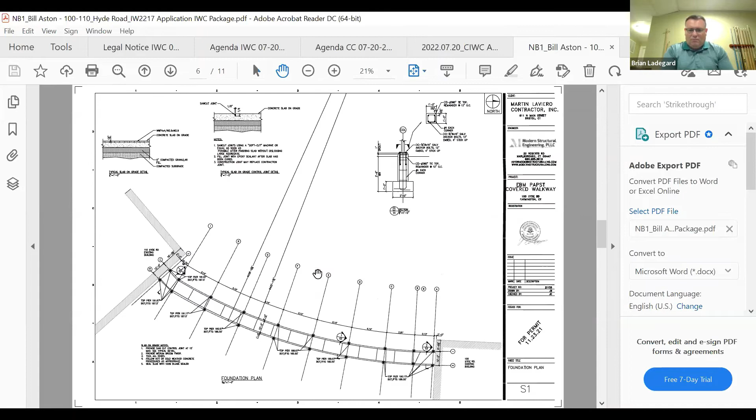Thank you. Essentially, what we'd like to do is take an asphalt path that connects two of our buildings there, and we want to convert it to concrete and then put a rooftop covering over it between the two buildings. Basically, just a roof so that we can walk between the buildings without getting rained and poured on. And that's pretty much it. We've discussed it with this engineering firm, and you could see the pictures there. Basically, that asphalt path seems to buckle every year and move around, and we're tired of patching and replacing it. And our preference would be to replace it with concrete and then cover it.

Okay. All right, so Ned, I'll start with you. Any questions, comments, issues? No comment. I think it's just, or no questions. The comment is, it seems like a very minimal change in the amount of runoff, just going from a roof runoff to a sidewalk runoff, and I don't see a problem.

Okay, Mark? No questions. Neil? No questions here. Okay, thank you. Robert? Just what's the general distance to the wetlands? I assume this is all buffer area work. Is that correct? Yeah, if you're looking at that photo, it's off, probably, I would say maybe 30 or 40 feet off to the left in that photo. Okay, thanks. I mean, I don't have concern with the proposal. It's largely going to come down to just a good soil and erosion control plan during the construction period. End of my comment.

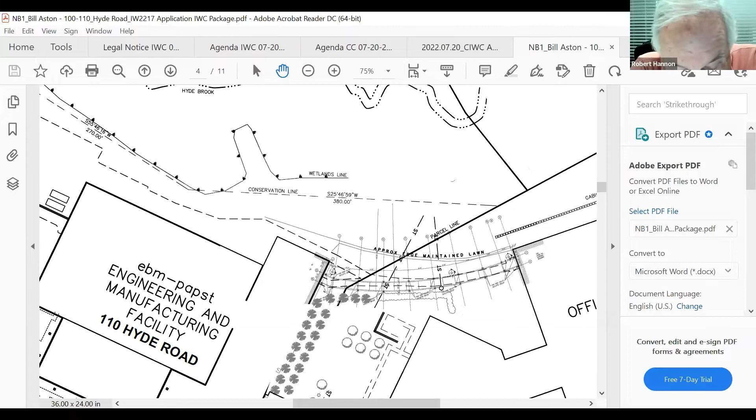Mark. Is there a second? I'll second. Second, Eisner. Okay. Have a motion on the floor to approve the application for 100 and 110 Hyde Road. All those in favor, please signify by saying aye. Aye. Opposed, abstaining. Okay. Good luck with it. Hopefully you get it done with the dry season. Make everybody's life easier, including yours. Great. Yep. Excellent. Thank you, guys. Okay, thank you. Good luck.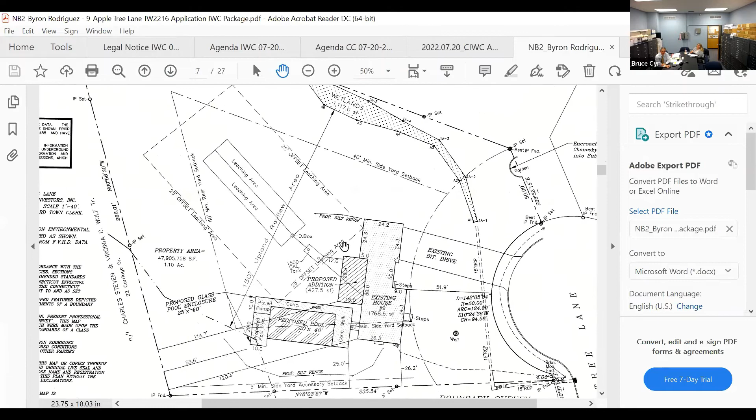Byron Rodriguez, 9 Apple Tree Lane. Hello? Yes. All right, do you want to give a little summary? This is the plan that you had last meeting, showing the garage in the back. You want to update them? I'll go to the next page of the plan you had submitted just recently. Yes, I canceled the garage in the back completely. And I'm just gonna go forward with the sunroom and the pool room. And the pool room, I'm gonna put an aqua shield on top of it. That's a glass shield. The company comes and puts it over the pool alone. And that's basically it.

Okay, so Ned, start with you. Any questions, comments? All my concerns were with the garage and the extended driveway. I don't have any questions about the pool. Okay, thanks. Mark? No questions. Neil? No questions here. Robert? No questions, just comments. Mr. Rodriguez, just work with the planning staff on the scheduling and soil and erosion control measures, should it be approved. That was my only comment. Okay, thank you. Dave? No comments.

Bobby? Yeah, I don't have a problem with it now that the garage is gone. No comments. Rich? No problem. No question. And I'll echo other folks, with the garage being gone, I don't have a problem with it either. So can somebody make a motion to approve the application as it's been modified? So moved, Ned. Is there a second?

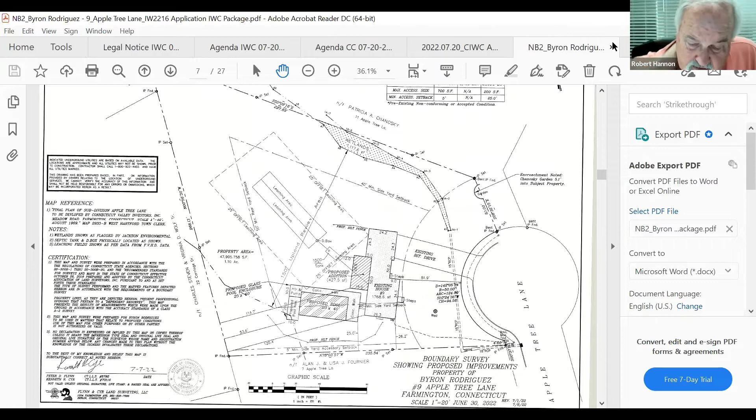Second, Rich. Okay, we have a motion to approve the application at 9 Apple Tree Lane as modified, so there's no garage associated with the development. All those in favor, please signify by saying aye. Aye. Aye. Opposed, abstaining? Good luck, sir. All right, thank you.

Okay, now we have 30 Portage Crossing. This is a new one, Bruce? Yes, this is. This was an application that we received, or that I met with the owners right before, or right the day of the last meeting. So I met with him out there in the field. We formulated an application package to put together. And what happened? There we go. It got bigger.

And the applicant is online. Are you there? Yeah, good evening, everyone. All right, if you want to give a little summary of what you're looking to do and update the commission, please. Sure. Thank you. And thanks everybody for entertaining this package.

So a quick background, if you can see in the layout, the existing house there, what we are trying to do is get some solar panels on the roof. So the solar company came in and did a site evaluation, but the concern that they raised was that I have a tree line on the east side of the property, starting from the north, which is on the road in the front, Portage Crossing, going back to the south, and that entire tree line, pretty tall trees, is blocking the entire roof.

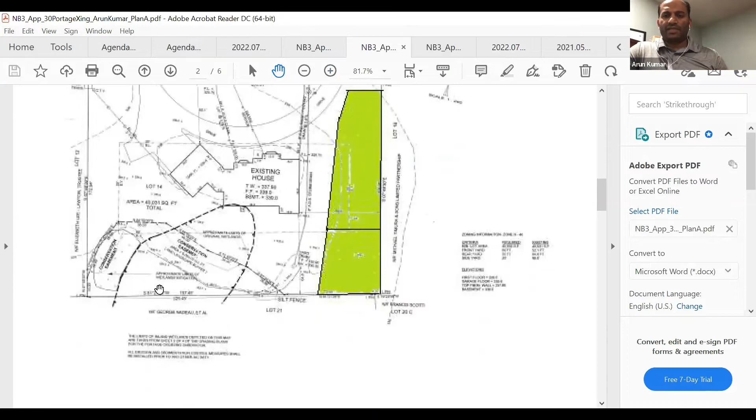No, the wetland is, and Bruce, you are the numbers guy, I guess there's a pool 200 odd feet away or something like that, right? Yeah, this was a conservation easement and a wetland area, comes down through here, then drains into this yard drain here, and crosses over to Portage Crossing. And what I did is, I did present a copy of the Wisteria Lane approval, to gauge a little more how large that wetland is.

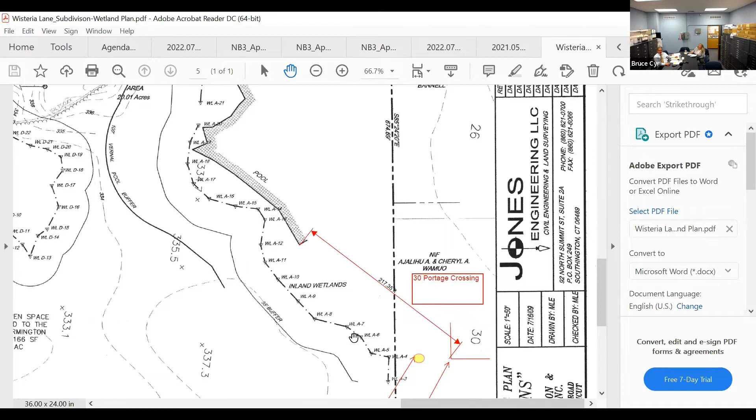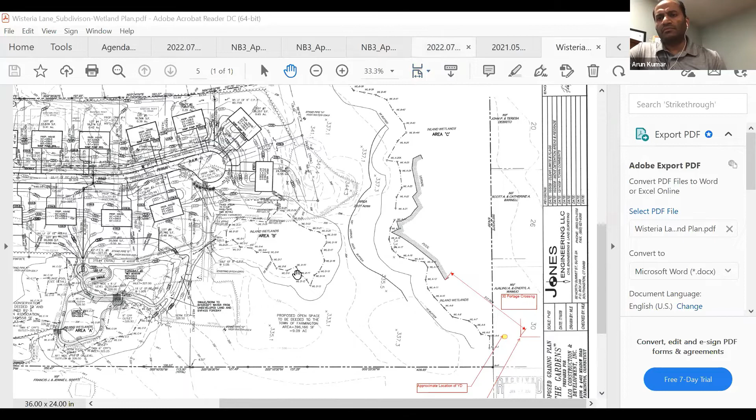So here's 30 Portage Crossing again. This shows that little stub of wetland out here, but it actually gets fairly large and comes out into this whole area. And this portion was flagged as a vernal pool during the development of the project. Okay, so the picture we showed before of the water and the trees, can we go back to that and tell me what's coming down? Nope, that's these.

Standing in the backyard looking out, what they're looking to do is remove all of these trees all the way back to the property line. So I panned from left to right here. So continuing down through here, all the way down to the back property line, which is somewhere back here.

As you see in this application, I had them break it here just in case the first request was for the whole thing. I suggested they come in with an alternate plan that would possibly be more feasible to the commission, which would be reducing the clearing to only, we'll say, off the back of the house and going towards the front, leaving at least some portion of the wooded area.

Okay, I think there was one more picture that showed some wetlands. Oh, that was the older picture. That was from last year. Oh, that one, yeah. Yep. So again, his house is over in this area here. Here's the wetland. It comes out, it bleeds into that swale and drains right over into that yard drain right through there. Okay, but those trees aren't coming down?

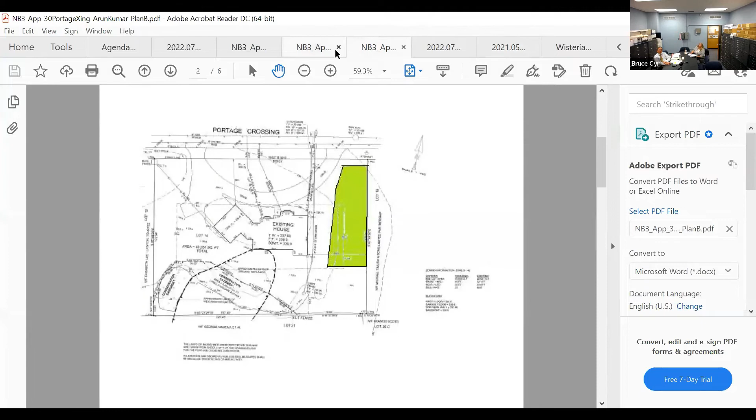No, let me go back to the other picture. So there's the two requests. Here's the yard drain here. So they'd be looking to go to the right of the yard drain to the back of the property line. So looking at it here, you'd be clearing these trees here. All right. If I can get a better picture. Of course, yeah. The yard drain is over here. So they'd be looking to clear these trees, from this tree all the way forward, approximately. Okay, thank you.

Was that it? Yeah, that's it. Okay. Robert? So if I understand this correctly, this is all just within the buffer area. The wetlands are actually off the property and it's not within the conservation easement. Exactly. So looking at this, I actually think this falls within the exemption for residential use as of right. It's all buffer area, not wetland proper itself. So I'm comfortable with it as a residential use as of right. Okay. David?

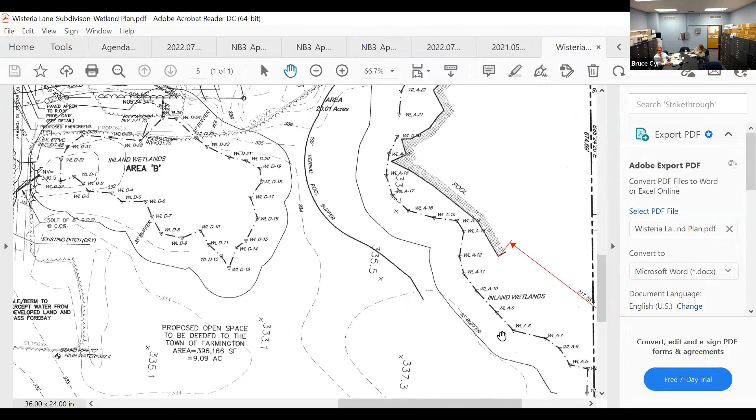I was looking at that Wisteria Lane thing. So the clearing is about 200 feet from the vernal pool. Is that right? Yeah, approximately. And again, this is where they ended the survey. Where that goes, I don't know. I think it was more dealing with this development and they were looking for this section. And between the house and the property line, that's grassed presently? This way, you mean? No, the other way. Yes, if you go back, you can see the distance better here.

Oh. I must have closed them out. So there's a lawn in between the trees to be cleared and the vernal pool. So here's the back of the house. There is lawn that stretches out here and comes around. Okay, thank you. All right. Okay, Bobby?

Yeah, if I heard correctly from the applicant, once those trees come down, he's gonna fill it in with dirt, which means you're basically displacing all that water and putting it somewhere else, which could cause a problem. I'll be honest, maybe I'm not in the majority, but I'm not a big fan of solar, especially when most likely it's gonna be a 15-year lease, if I'm not mistaken. Are you buying these solar panels or are you leasing them? Sorry, I'm buying these.

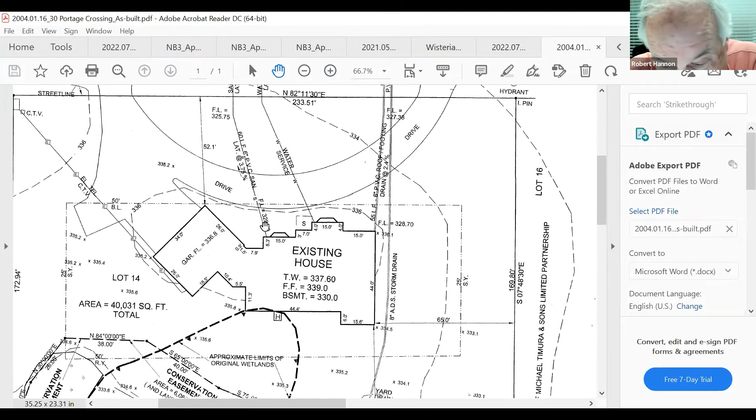And I don't see any reason why the trees, at least from the street, was it a 50-foot setback for the front yard, Bruce? This one is, yeah, because that has no impact on the solar panels. So I guess my concern is going in and cutting down everything in that area 50 foot when I'm not sure that's absolutely necessary. Right. I understand about putting solar panels on. I understand the uses of shading. But I also understand what happens when something gets clear cut. And I'm not sure that that's something that's absolutely necessary right now.

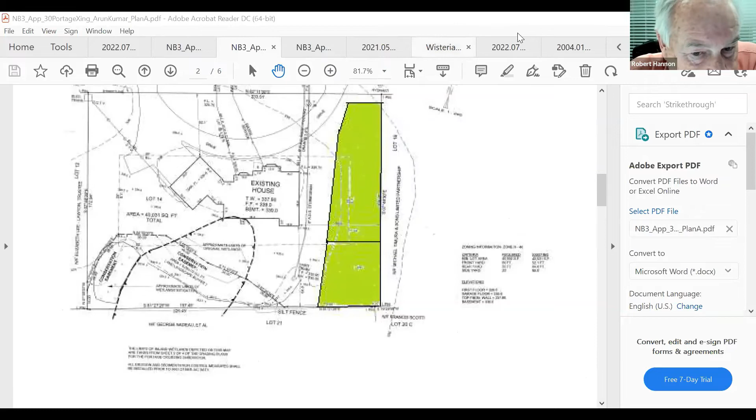I mean, some of the trees didn't look like they were that high. My guess is typically what you're looking at is exposure from 10 o'clock in the morning to 2 o'clock in the afternoon. That's when you want to make sure you're not in the shadows. So there are some trees I can see that are definitely tall enough where they would need to come down. But some of the smaller ones that you see there, it looks like maybe a 3-inch, 6-inch diameter tree. Some of those would still be viable, and I don't think they'd have to be cut down. So I think this is something that would need to be looked at a little more closely in terms of just exactly what needed to come down versus what you want to come down.

I'm just not overly thrilled with going in there and cutting all the trees down at this point in time because it's not necessary, especially up in the front part of the yard. So I'd like to see a plan that's more selective in terms of how it actually impacts the solar panels. And that's something that the company should be able to identify, what trees should come down. And I'm saying that from experience, both personally here and also having reviewed a number of solar projects across the state in a number of different capacities. So that's kind of where I'm coming from on it.

Mr. Kumar, are the panels only on the back of the house, or are they on the front as well? So they are stretching from east till west, but at the same time during winters, the sun moves a little bit towards the northern side. So that's the reason why even the trees towards the front do impact the energy generation capacity of the solar panels. But are you putting panels on the front as well, or just on the back? On the back. Okay. And they're going to tell you in the wintertime, don't plan on getting much in the way of power because you won't get power in the wintertime. It's maybe 10 to 15% of the summer, maybe, if that much.

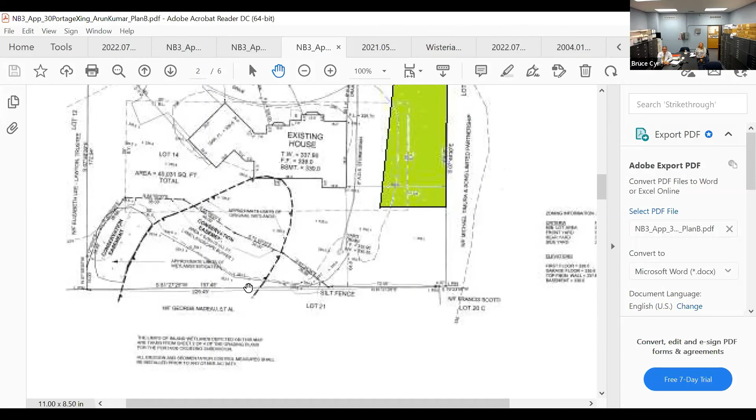Well then. I was actually measuring the vernal pool, but as you can see, the wetland line comes up to here. And when you look at the as-built, it's on his property. Right here, this is the conservation easement. This is the wetland here. So the wetlands come right up to the back of the property line. And then they bleed out into this yard drain, and it goes out into the roadway. Okay. What's the dark hash line where the conservation is, that wetlands? This was, I think, either the original wetland or whatever when this subdivision was first developed. I didn't dig too deep, but the wetlands is located here, and the conservation easement was then set here. Okay.

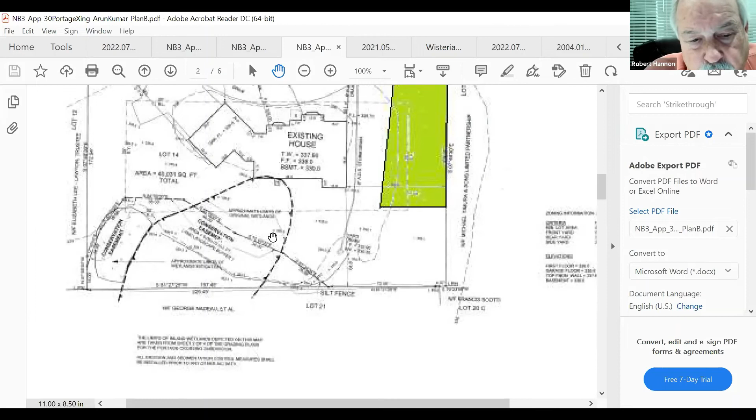So for the most part, that entire area pretty much falls within the 150-foot buffer setback area. And if you look, I go back to the other one here. Yeah. 168 feet. So pretty much, as we said, the wetlands is over here, sorry, 169 feet. So the wetlands is all pretty much here. So pretty much most of this will be within the 150-foot review area.

So I think the first thing to do is work with the solar company and let them identify what trees they think need to come down. I can't believe that it's everything. But yeah, I can believe that there will be a number of trees that they would suggest come down.

Okay. And then come back on the 7th, and hopefully by then we've got things kind of worked out and figured out for you. Okay. Okay. Hopefully that helps a little bit. It does a little bit. I agree. Yeah. I understand your frustration,